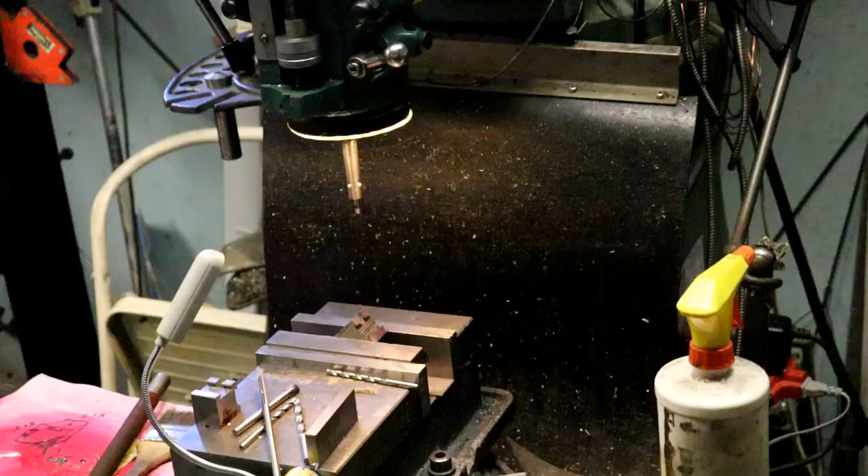Okay. Setting up to drill the hole for the locking mechanism. The camera had shut off, so I don't know where the camera had shut off, but I have it in the right spot on the y-axis. X-axis I got to center. I have to center it this way.

So I put my edge finder in, and I'm going to bring that down. And I'm going to come in and just touch it right where the tools will ride, the bottom of the dovetail cut. There. Zero my X. And I'm not going to move it up and down now, the spindle.

Now, I'll go around to the other side and come in and touch it there. There, do the half function for the y-axis. Put it on 0. Oh, y-axis. I just messed up my y-axis. It was x-axis. Half function, you dummy. So we'll end up doing that in the inside slot now. That's okay. I did the half function on X.

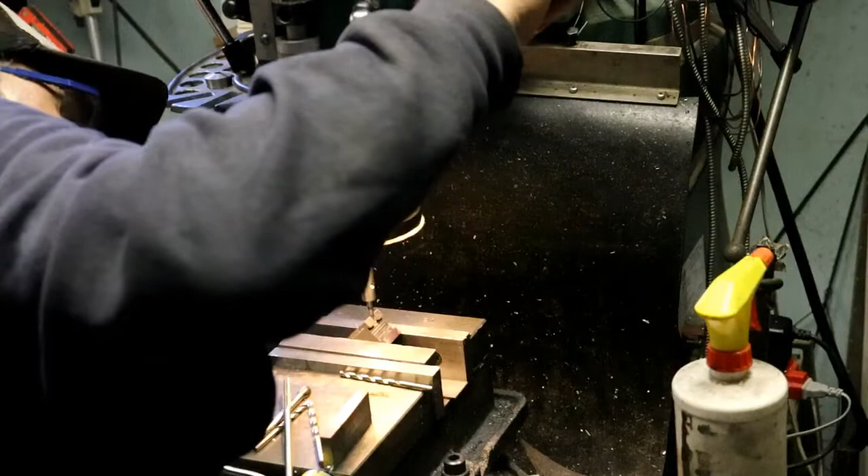Right there. Okay, so now we're going to have to do the half function here. Down. Now we'll go with the y-axis in the slot here. Right there. 0 my y. Here to the side. Half function y. Oops. There we go. All right, we're back in business.

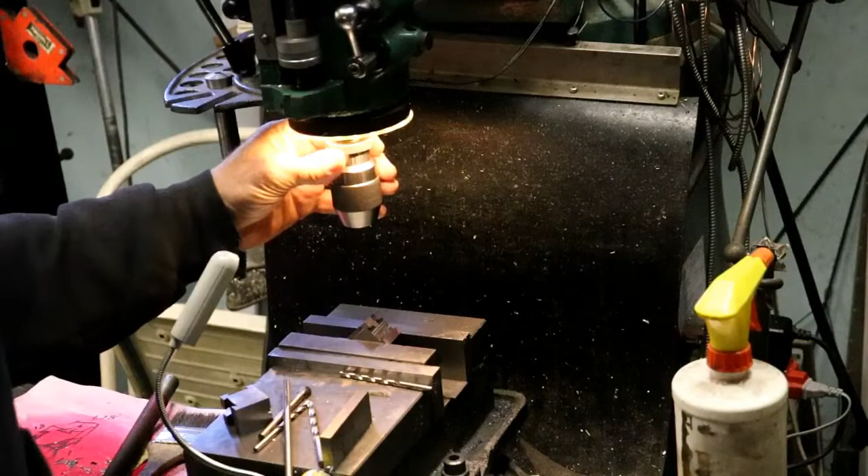Now, like I say, I don't know when the camera shut off, so. Now we're going to spot drill first. Spot drill again. We need to drill. I'm going to double drill it and then ream it. And we want to go a depth there of 625, I believe it was. We're going to go 625 deep.

So I'll put my block, zoom out a little bit so you can see what I'm doing. I've got a block here. It's a Jo block, a rejected Jo block that I picked up. And I better turn the music off. Oh yeah. All right.

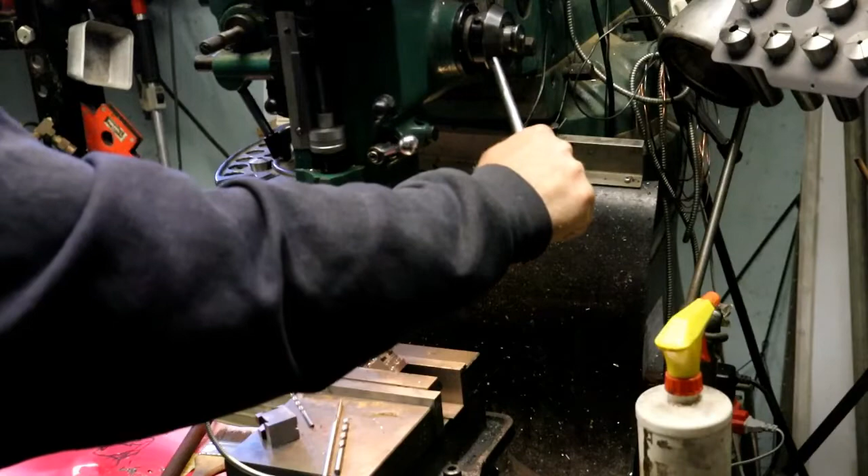So we'll come down and we'll touch, and then we'll turn the stop up against that. That's just so I don't have to turn the stop all the way up. All right, now we'll go up, crank the table up 625. 1, 2, 3, 4, 5, 6, 25. Okay. Here we go. That's 625 deep. Now I'm going to crank it back down.

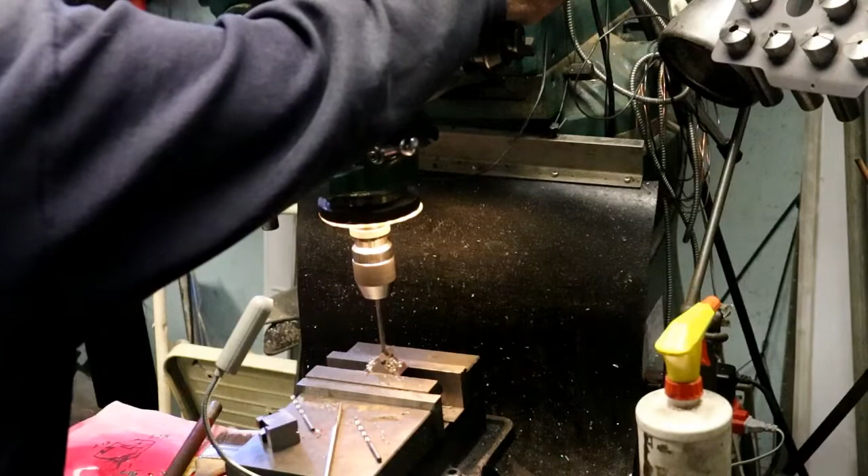Put my ream size drill in. Come down and touch. Crank this up. Then go 625 up again. 1, 3, 4, 5, 6, 25. And now the reamer, we'll have to probably crank it way down in order to get the reamer in there. Give the reamer a little oil. Shifting low. And ream it.

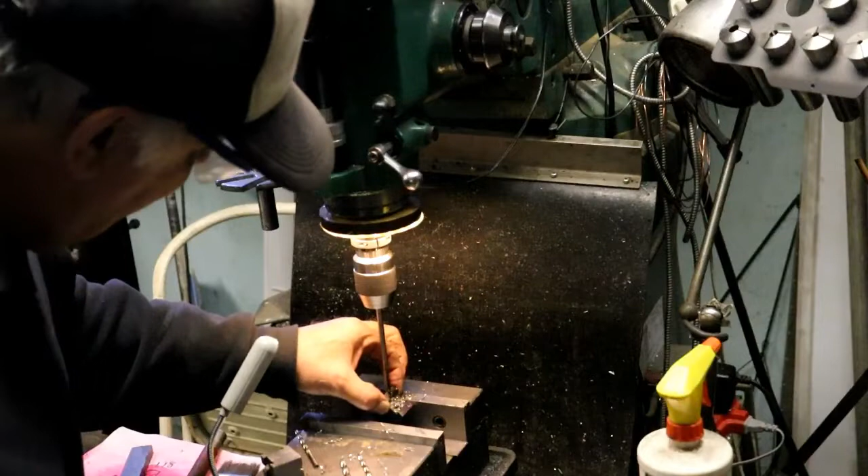Okay, now all I want to do is take the V-block out. So parallel out, and I'm locating on the reamer yet. I'm just going to pull it down and lock it. The reason I'm doing this is I want to drill a hole all the way through now, and I can't do that into my V-block. So I've got it held up onto the reamer, oops, gotta pull this parallel underneath. Tighten it up. Take the reamer out, and we're actually done with the reamer, so wipe that off and put it away.

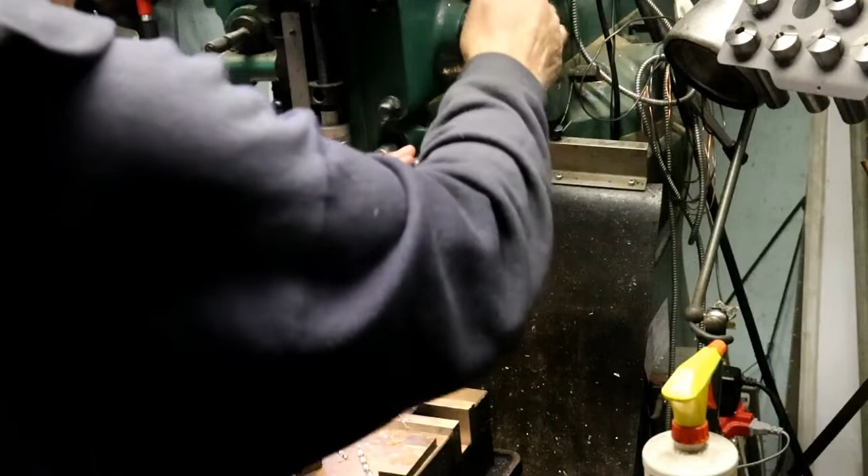Alright, so now we want to drill a 3/16 clearance hole, because it's going to be a 3/16 screw coming through there, a 3/16 stud. I'm going to drill it in here at 190. Now we can take the block out of there. Don't need it. Shift back into high. Take that out. A little shot of air. And there we go. We got the hole drilled in.

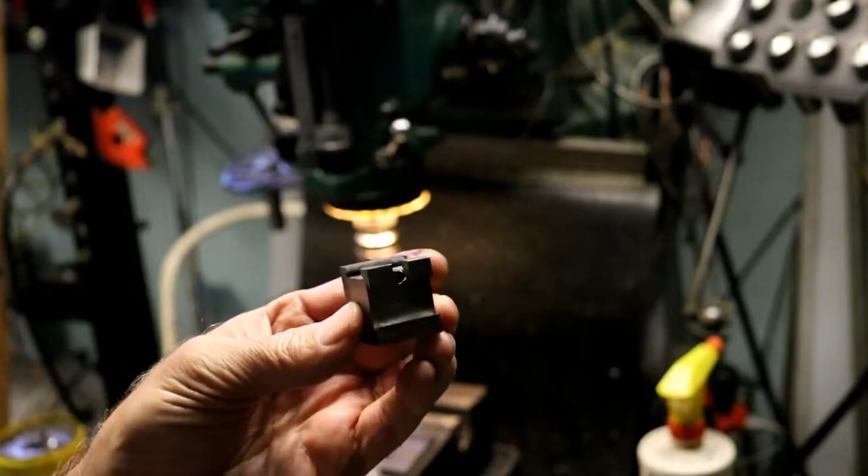So now what's left on here is the 2 height setting pins and the flat on this side. So what do we want to do next? Probably put this flat on. We need to deburr that hole, but I'm going to put it back in the V block, and we're going to come up and mill this top down. Let's see, how far has that got to go?

See, now we're talking a distance from a tooling hole that I put in on the drawing. I put in 2 tooling holes here. I should have just gone ahead and done that. Then I could take all my dimensions to it. Although it doesn't matter what I go down to, as long as I have room enough in there for a counterbore.

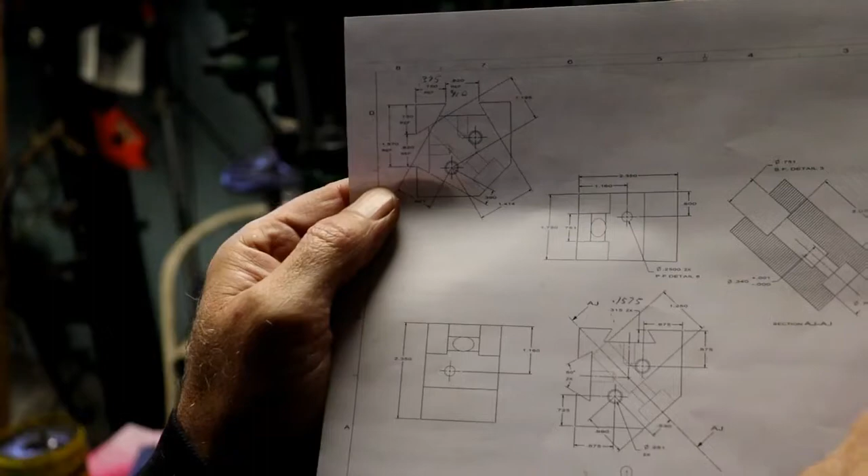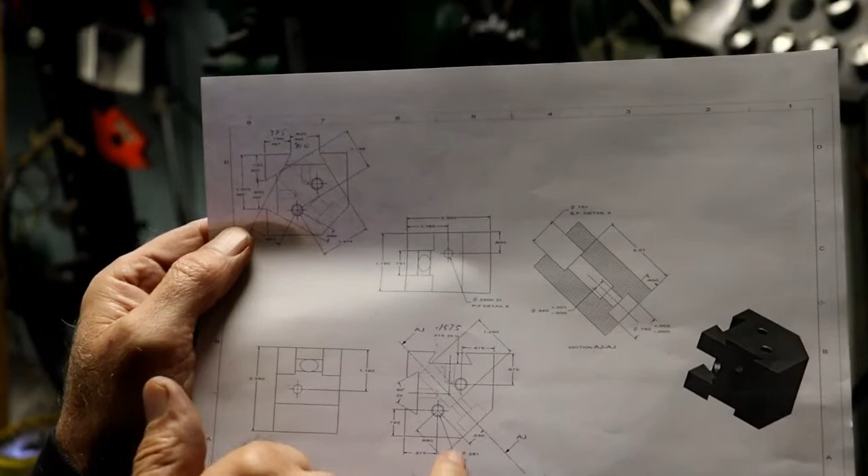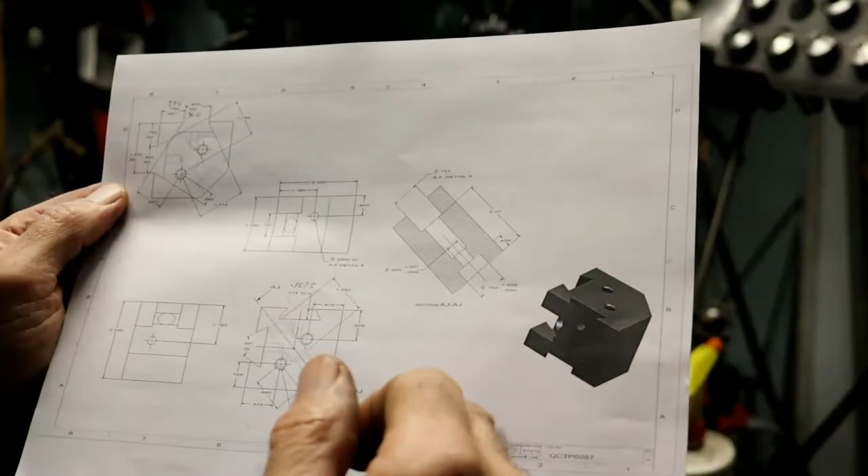So here's the drawing, and right here you'll see those are the two hold down holes. The two hold down holes here are used as tooling holes. So everything is dimensioned off of those holes. The dimension down to this flat is right here to a tooling hole. So I need to go ahead and put those holes in. And it's 875 over and 875 up.

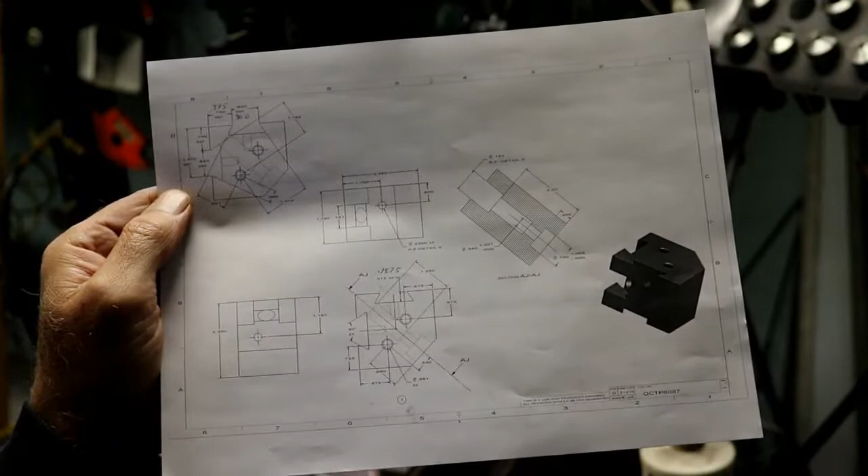So I will go ahead. I don't need to scribe them both, but I will, because those are going to be the hold down holes anyway. So I need to scribe them in or put them in. So let's go ahead and do that. That's just kind of a step that I neglected to do, and I should have done it right away, and I didn't. And now I'm stuck. But that's okay. We can still do it.

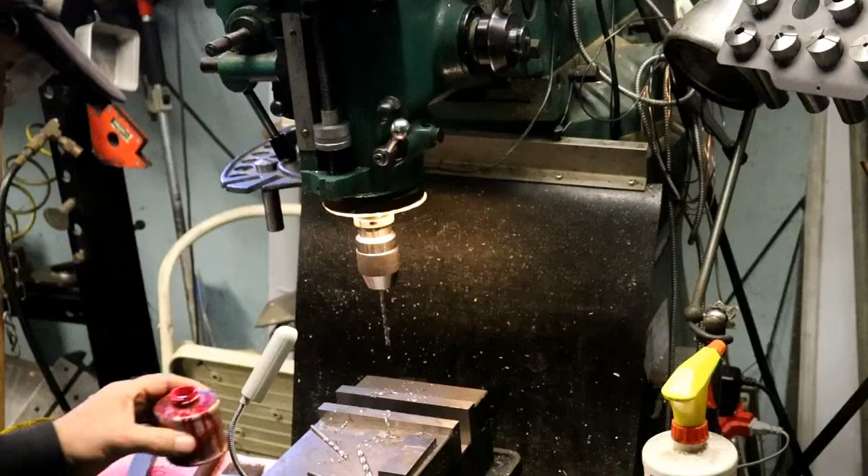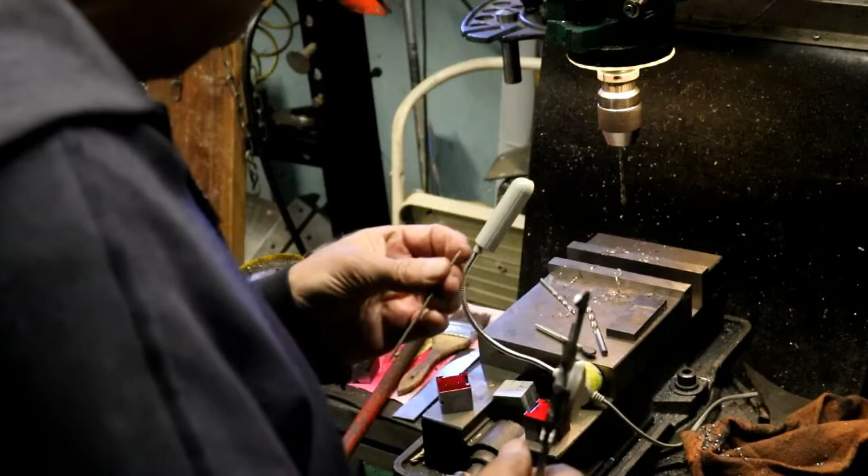Let's Dykem them all up. Take a minute or so for the Dykem to dry. I just brushed it on. And I will set my calipers to 875. Get a scribe. Looking for my scribe. There we go. Nice sharp pointed scribe. Try to get the Dykem to dry.

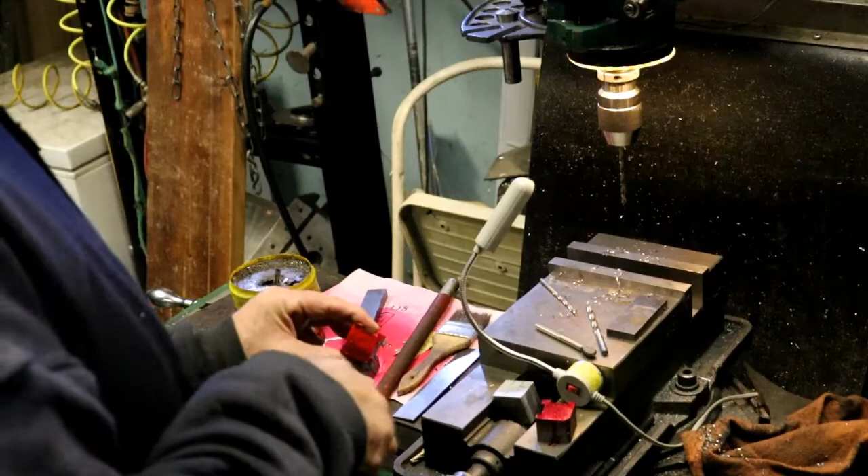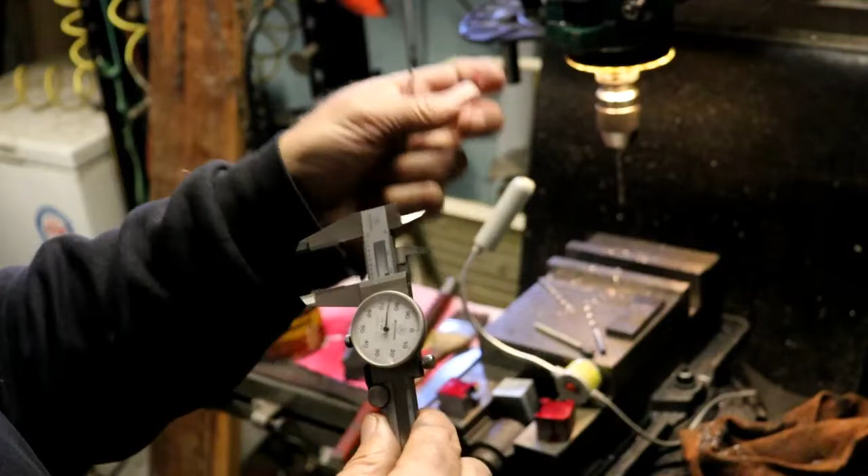All right. And my calipers has a flat here on the Mitutoyos, on most Mitutoyos. You actually have 4 ways of measuring. You can measure here, here, here, and here. And I use this step a lot for, like right now, for instance, for scribing. So I'll just take and push that step up against it.

Oh, 875 divided in half. 437, is that what it is? And we'll figure it out. And calculator. Yep, 437.5. See, I knew it. I just didn't want to go with that and make a mistake. Okay, at 437. Set my calipers to 437. Put the little step on there. Put the mark on. Do it again this way.

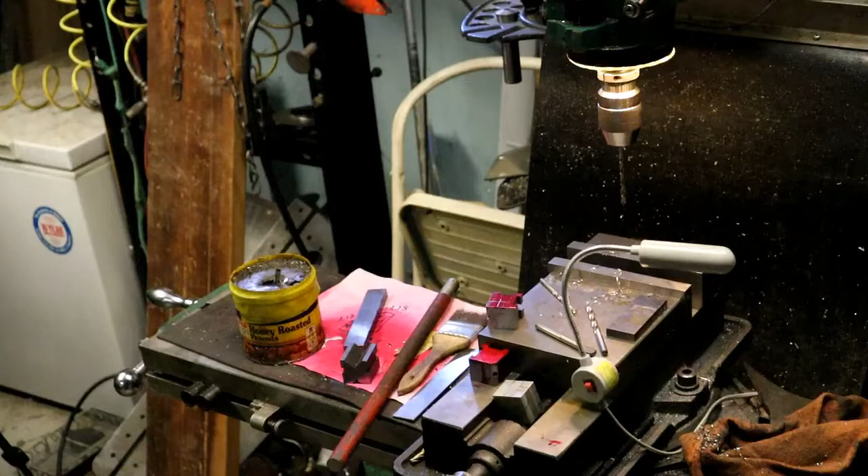Alright. Same thing here. Oh, that's 437. No, it's not. Caught myself again. Just about made an error again. It is not 875 both ways. All right, let's get this over here and get this right. So I went 875. I had it all wrong. It's 875 down from the top here on the side where the dovetail was cut.

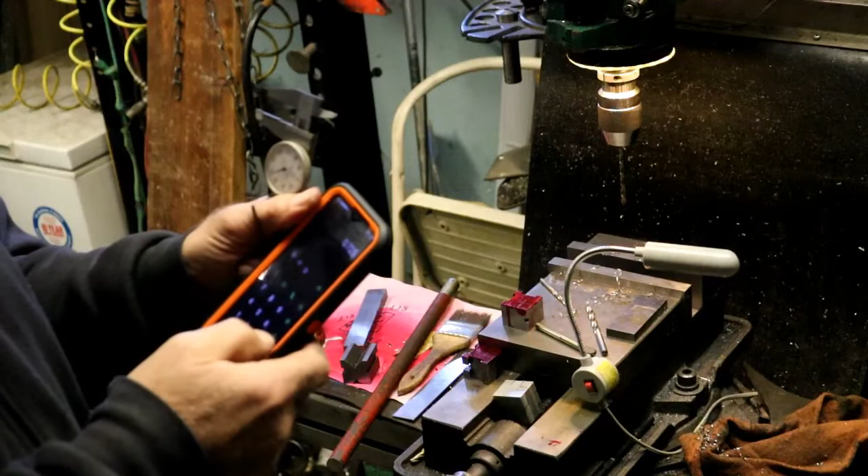I should just go over to the surface plate and do it correctly. And then it's in from this side is 725. 725. Come on. 0.725 divided by 2. 362. Set my calipers at 362. If you had the drawing, you'd see what I was doing, I'm sure. Right there. Okay, I have the mark right there.

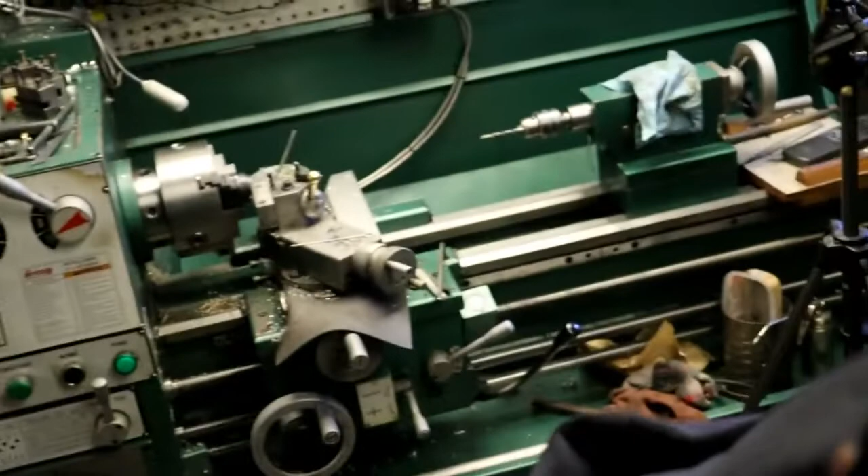You know what? I am going to go over the surface plate. So I'm going to shut the camera off, and we're going to move over to the surface plate. Actually, I can just probably just swing you around here. Raise you up. So you're looking over my toolbox. Ooh, close up. All right. Probably move you over further. All right.

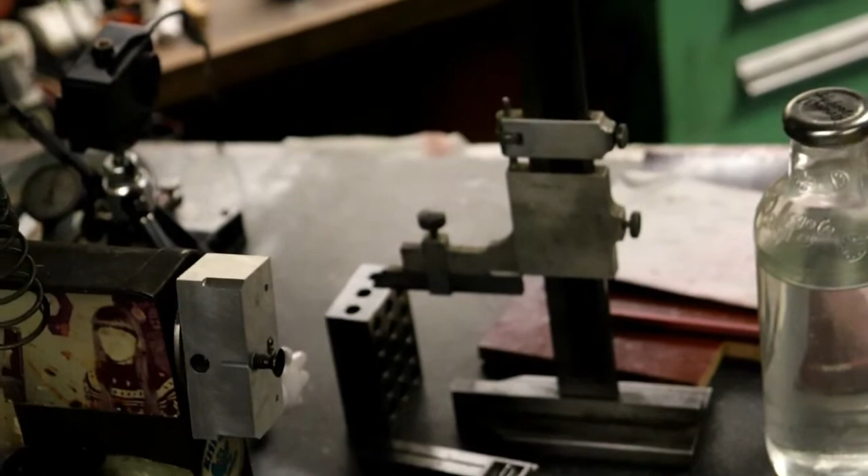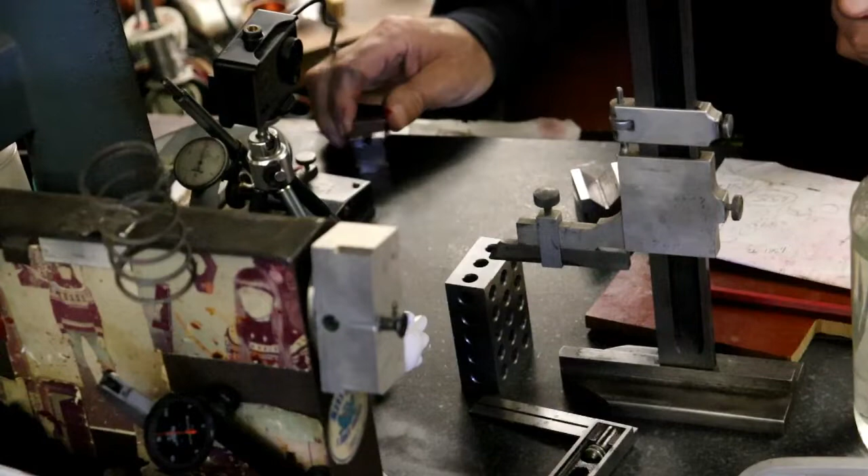So, what I'm going to do is take my V-block over there to the surface plate. And we're going to set it down here. And I don't know what the number really is to that, because I don't have a number up. So that scribe mark that we just put on here, with the scribe, I'm gonna pick it up and measure it. So let's take and... oop. Come on. Slide down. Lock the top. Right, is that it right there? We're just doing it to the scribe mark now, so. Down just a little bit.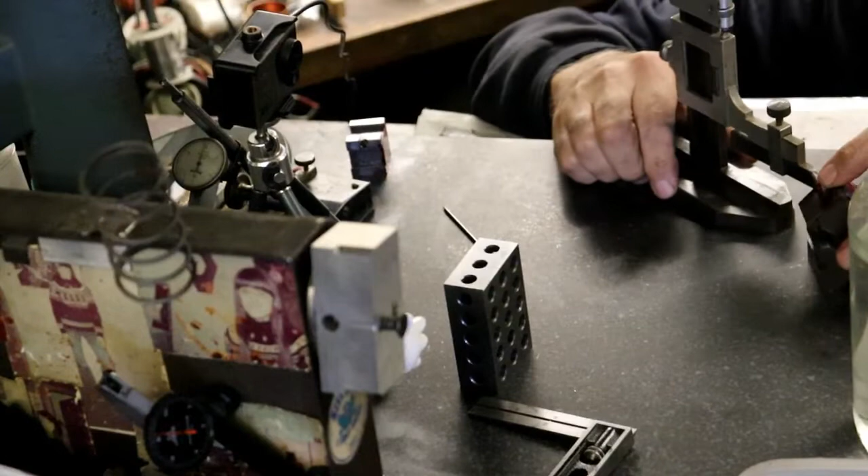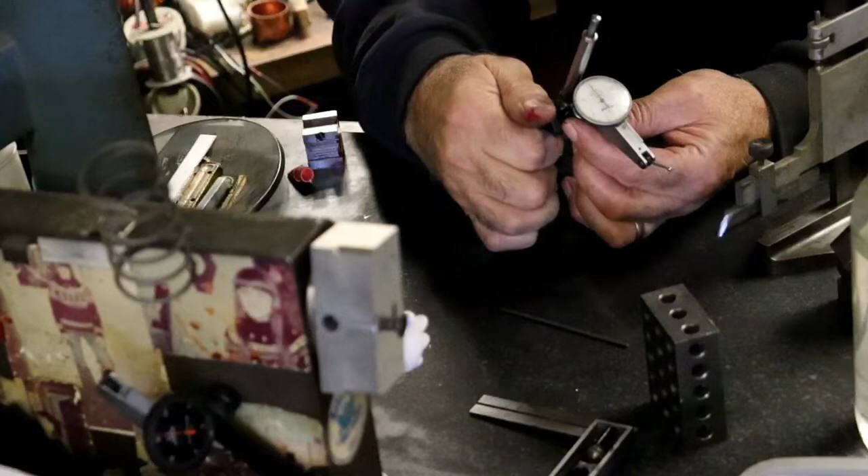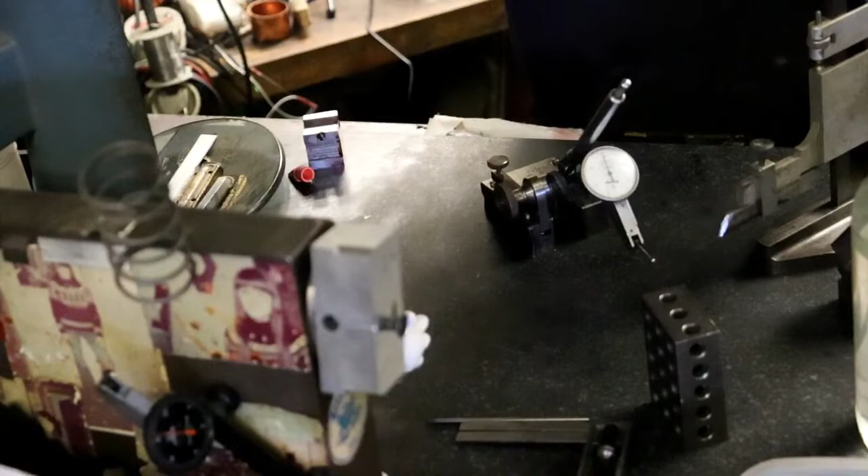Okay, so I've got it right there. That's the height. So take a little height stand here and get underneath there and transfer it to the Cadillac gauge. Zero. Go here. See what we got. All right. So we've got a height of 1 inch 750 up to that spot where that hole is.

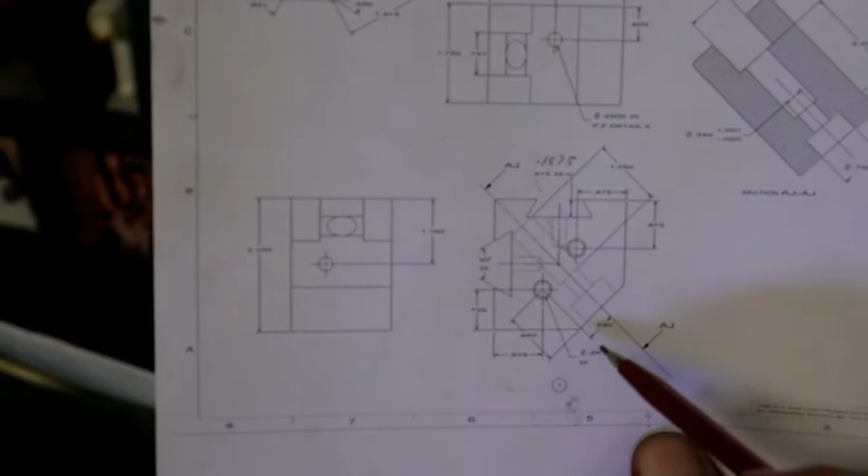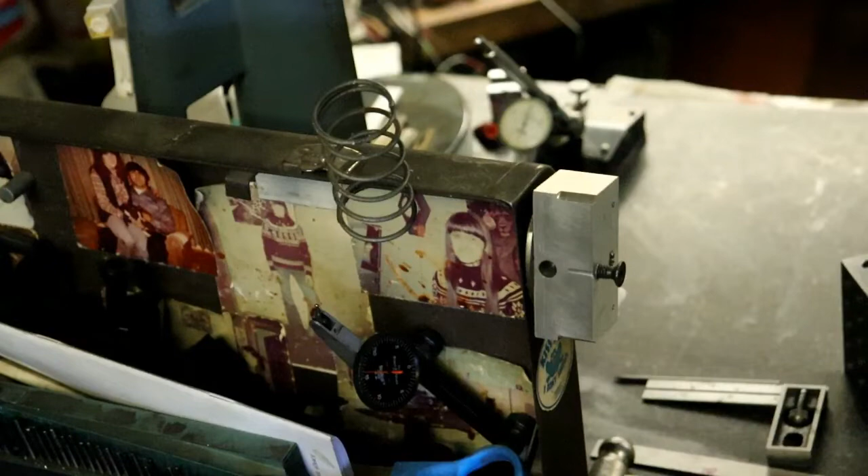All right, so now we know we got it set in there. We know the height from in the V-block from the table is 1 inch 750 to that mark, and we want to go up 990, or is it, I can't tell with the lighting here. Let me get over here. I need more lights in the shop is what I need. 990. So it'd be .990 divided in half.

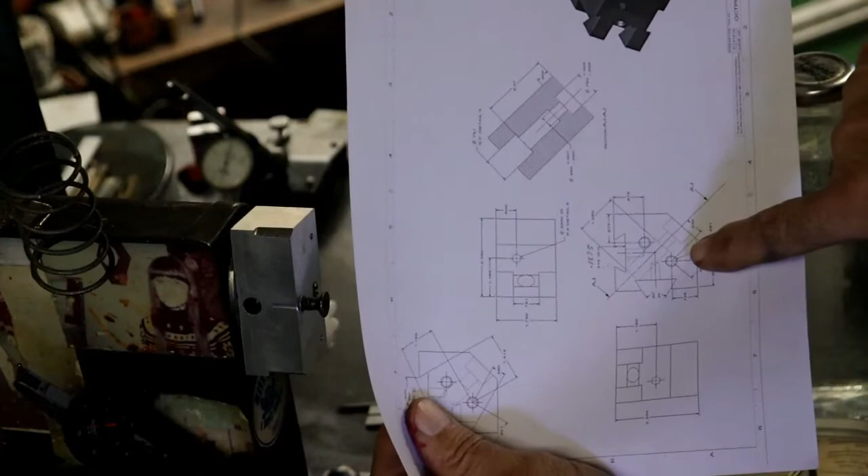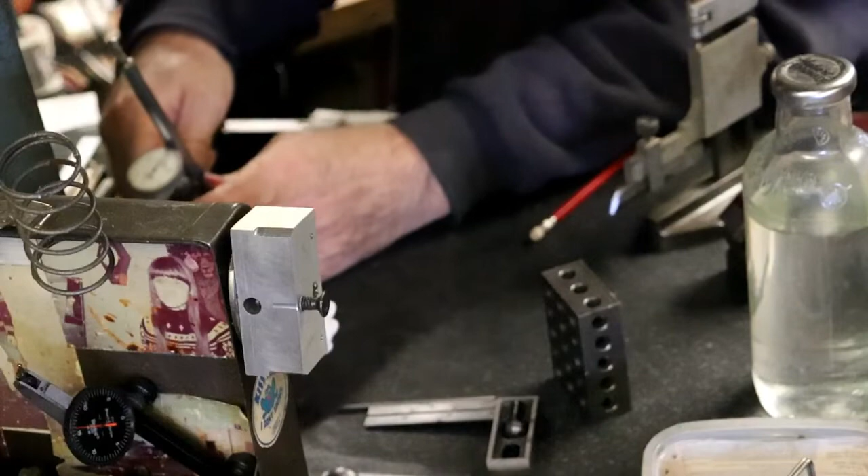Okay, the camera stopped. I restarted it here. I did the calculations to that. After picking up that point, I need to set the height stand at 2 inches 245, and that'll be the height of that. That'll be what I need to cut to. So 2 inches 245. All right, get under there. Okay, the needle's at 2 inches 245. Set the scribe to that height.

Right there. Oops. There we go. And we'll scribe that. And that'll be the depth we want to go to. Nice mark right there. Set the other one in there because they're both going to be the same. This isn't really all that critical because this is where your lever seats up against, so it can be off a little and it wouldn't matter anyway. So, ooh, wee.